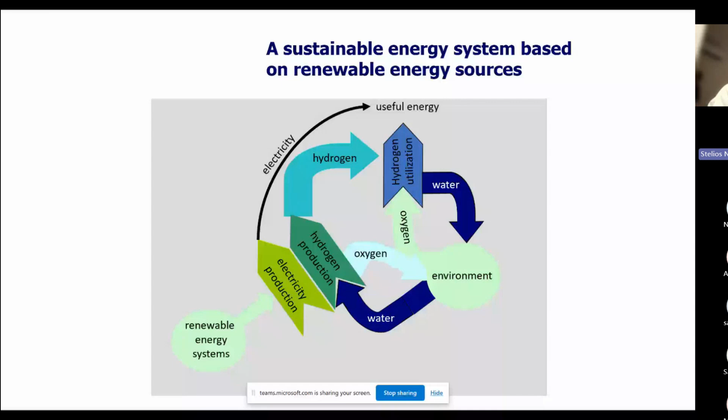So the idea is initially to produce hydrogen. How do we produce hydrogen? The hydrogen, when we're discussing green hydrogen, is mainly produced based on water electrolysis. So we get renewables and we electrolyze water to produce hydrogen and oxygen. Hydrogen is mainly stored, which is used afterwards with any fuel cell technology to produce electricity, just to feed and provide electricity to any kind of needs that our modern societies require.

So I will focus mainly our discussion on the fuel cell technology that we have developed, and discuss a few applications based on this technology, because as you know, there are different types of fuel cell technologies, based mainly on the materials and the ionic transport that each technology is using.

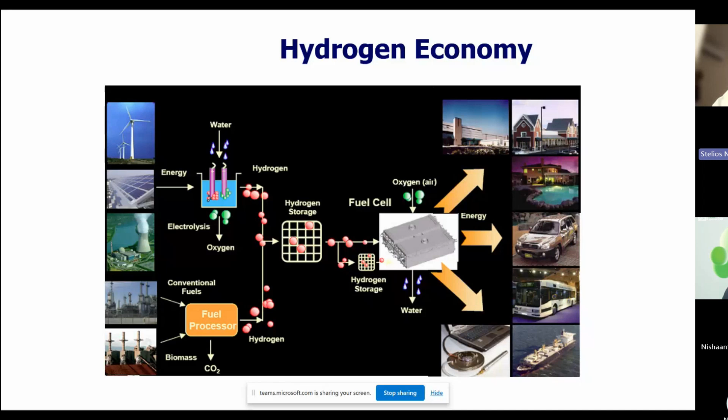This technology has been developed over the last 20 years. It is a proprietary technology, and the investment in this, and the research projects that were activated to do this, are estimated at over 20 million euros.

So we have a vertical know-how, and as you can see, we have activities and knowledge on the development of new catalysts, polymer membranes, polymer electrolytes, electrodes and membrane electrode assemblies, engineering and designing of the electrochemical reactors, and the balance of plant that is needed to put all this technology into operation.

So you can see a real view of what we are producing here. On the left side, it is the so-called high temperature PEM fuel cell. This is an example of a 2 kilowatt fuel cell. We are also developing high pressure PEM electrolysis, approaching 100 bars.

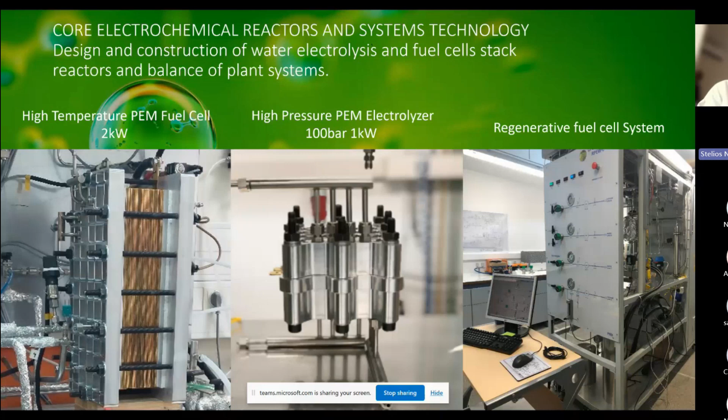All these activities, over the last 10 years, have been developed and financed also by the European Space Agency, as you can see. And you can see the balance of plant just to incorporate these two and work to produce electricity, produce hydrogen, and also electricity from the renewables.

I would like at this point to mention my colleague, Professor Ioannis Kallitsis, who is a professor at the University of Patras. He's a polymer scientist, and together with his group we have done all these developments that I'm going to show you.

This is sandwiched between the two electrodes. The electrodes are conductive, and they contain the so-called electrocatalyst, on which the two half reactions, the anodic and cathodic reactions, take place. This assembly allows the oxidation of hydrogen at the anode into protons and electrons, and the reduction of oxygen at the cathode into water, by reacting the oxygen with the protons and the electrons.

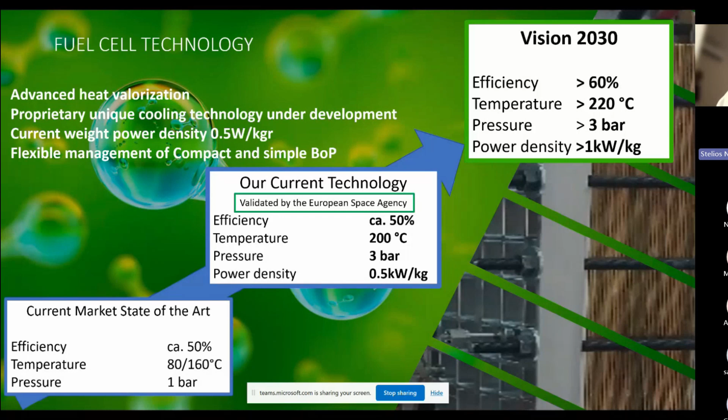So I will enter and discuss a little bit on the applications. I will start with the unmanned aerial vehicles or small aircrafts. This technology is quite interesting for this. This is an example of the fuel cell that we have created in collaboration with the European Space Agency.

For the time being, we are working on this for the development of a system for life support or for lunar applications. On the right side, you can see the characteristics of the system and of the reactor, and you can see it is possible, at the very end, to operate at an efficiency of around 55% and a power density of around 0.6 watts per square centimeter.

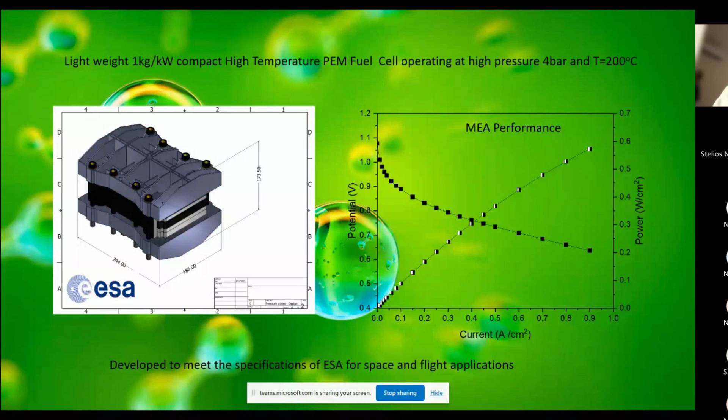This is the system that we have in mind for the applications regarding the UAVs and the general aviation. So this is a very simple balance of plant. You have only the fuel cell, which is air cooled, so you will not need any voluminous heat exchangers to cool down the stack.

You can have hydrogen and oxygen either in high pressure or in liquid form. It is something that is under discussion in the case of aviation. And what you have to do is control the flow that is entering into the system. So we have a very simple balance of plant. We can supply the gases in a pressurized form.

The fuel cell, due to the fact that it's operating at this high temperature, it is very easy to cool down by just blowing air on the fuel cell. And the fuel cell can be heated very fast and reach 100 degrees, which is the starting operating temperature of the fuel cell, in 5 minutes. And the heating up process is done electrically, utilizing a very small battery to do so.

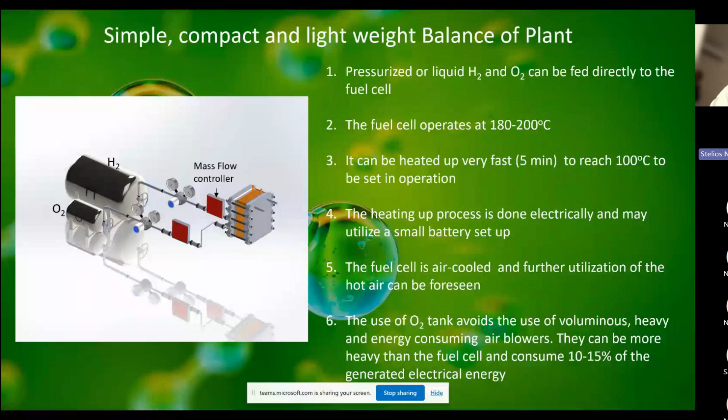And the fuel cell, as we said, is air cooled, and we are proposing the use also of an oxygen tank instead of incorporating voluminous air blowers that will add additional weight to the system. So the resulting benefit of using these high temperature PEM fuel cells is that the high operating temperature of the fuel cell can allow it to be very simple, cooled down with air.

The feeding gases are not humidified, and I can compare this technology with the low temperature PEM technology that needs humidified gases. So you need another peripheral, which adds additional weight to introduce. And this makes, as we saw, the balance of plant quite simple.

The feeding gases can be introduced into the stack even at very low temperatures, even below zero. So there is no reason to develop systems to heat up the gases. And the cooling effect of the oxygen and hydrogen entering into the reactor is very minimal. So we estimate, and we also measure, less than 10% of the heat produced by the fuel cell is needed to heat up the gases.

So the stack can easily afford operation at higher operating pressure. It can operate at 3 or 4 bars, and this is something that is already proven. We can achieve right now fuel cell power densities of 0.5 watts per square centimeter. If you put the fuel cell together into a system, the power density of the system is around 1 kilowatt per kilogram, which makes this system quite competitive with the conventional internal combustion engine systems used in aviation.

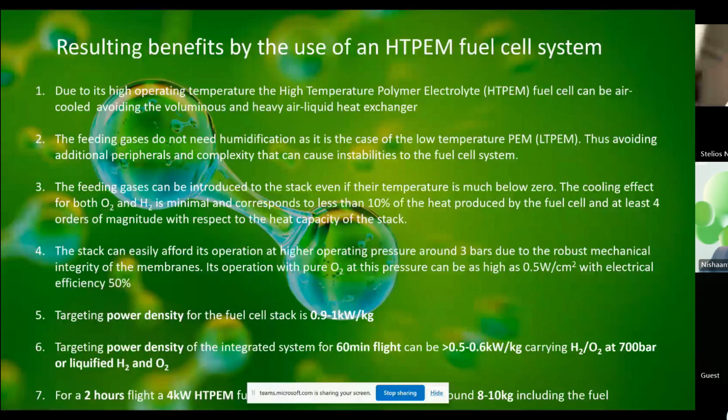The other thing we have to mention, especially when discussing UAVs, is that it is estimated that the flight time, by using fuel cells and pressurized or liquid hydrogen, can be doubled, and we can achieve longer flights as compared to the batteries that are being used right now for UAVs.

Another application, I will go faster in this, is the use of these high temperature fuel cells for stationary and industrial applications. Why am I focusing on this? Because of the high temperature operating temperature of the fuel cell, we can produce superheated pressurized steam, which can be used for several applications. I can give one example here: this pressurized steam can reach pressures up to 10 or 12 bars, and this can be even useful to operate a steam turbine and increase the efficiency in electricity production.

This is achieved because we have developed a closed loop for the cooling down of the stack. In this way, we are cooling down the stack by using a two-phase water-steam flow through the fuel cell, so that the coolant, which is mainly water, is operating continuously at the operating temperature of the fuel cell. So the fuel cell is cooled down by removing the heat from it through evaporating water, having a two-phase equilibrium within the stack to cool the stack down.

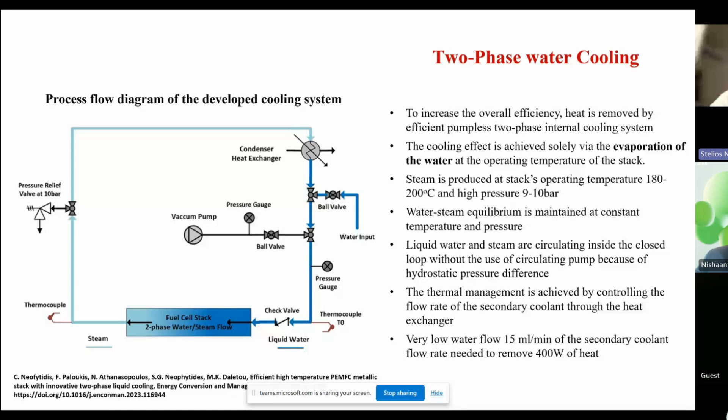In this way, we are able to come out with a steam which is at high pressure and high temperature, and can be used for several applications.

One application is mainly to produce electricity from natural gas, and this way we are able to increase the efficiency of the system by utilizing the heat produced by the fuel cell. When the fuel cell is producing about 1,100 watts at 180 degrees Celsius, about 440 watts can be used to create steam, which can be used in the steam reforming reaction of the LPG or natural gas. In this way, we can utilize this heat just to keep a high systems efficiency.

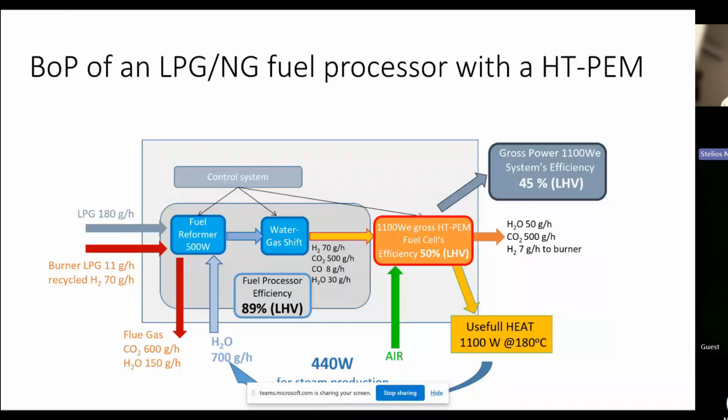Otherwise, if this is not done, the systems efficiency can be as low as 35%, which means we are losing a significant part of electricity. Instead of getting electricity, we're mainly producing heat. In industrial applications, we can have several examples of using this high temperature and high pressure steam for various industrial chemical processes. This is how the system I described before is operating.

What we are doing is using the reformate produced by the reformer. This is the performance of the fuel cell with that reformate. Because of the high temperature, there is no reason to completely clean up the reformate from carbon monoxide, as is the case with low temperature PEM fuel cells. You can see that the performance of the fuel cell is more or less similar to its performance when fed with 100% hydrogen.

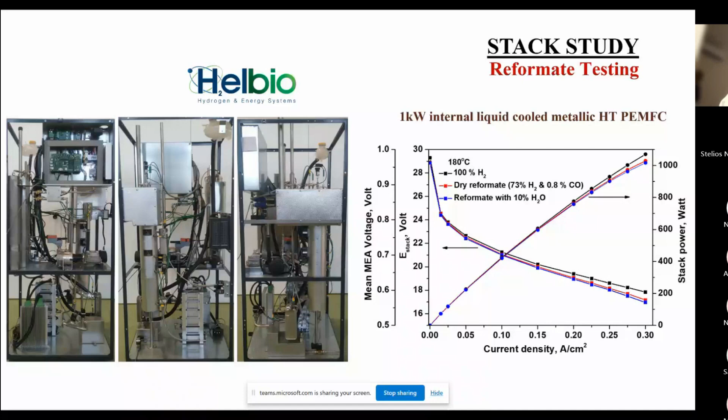I will say a few things on high pressure PEM electrolysis, in order to introduce you to the regenerative fuel cell approach. With water electrolysis, it is possible to split water, as you can see here, using renewables, into hydrogen and oxygen. Beyond this, with PEM electrolyzers using a polymeric membrane as a proton conductor, we are able to pressurize hydrogen and oxygen at very high pressures. At this moment, we've managed to do it up to 100 bars in a 1 kilowatt electrolyzer.

In this way, we are able to avoid voluminous and low efficiency hydrogen compressors. So the electrolyzer system is operating both as a water splitting machine and also as a pressurizing machine, a compressor for hydrogen storage at high pressure.

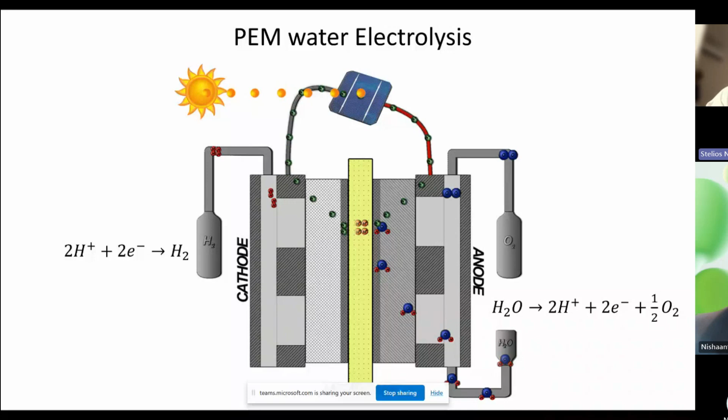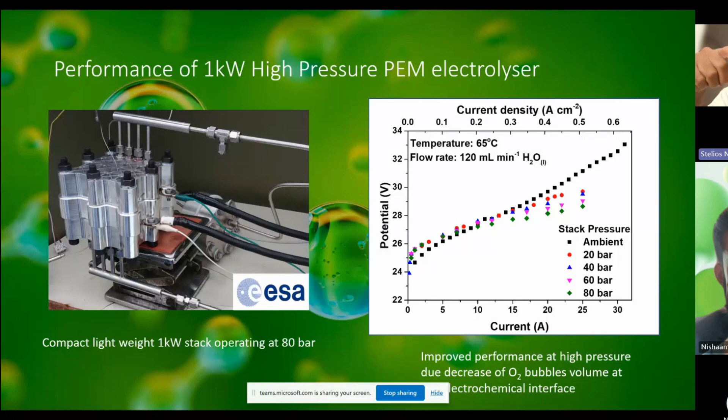This is an example of the reactor we produced for the European Space Agency, with specifications to be lightweight and to operate at very high efficiency, close to 85 to 90%, because we do not want to lose energy and produce excess heat from the system. This was done within the framework of our collaboration with the European Space Agency.

This is where we are now: operating at this high pressure with 82 to 85% efficiency, and aiming, with appropriate development of electrocatalysts and engineering of the system, to approach 200 bars at 90% efficiency.

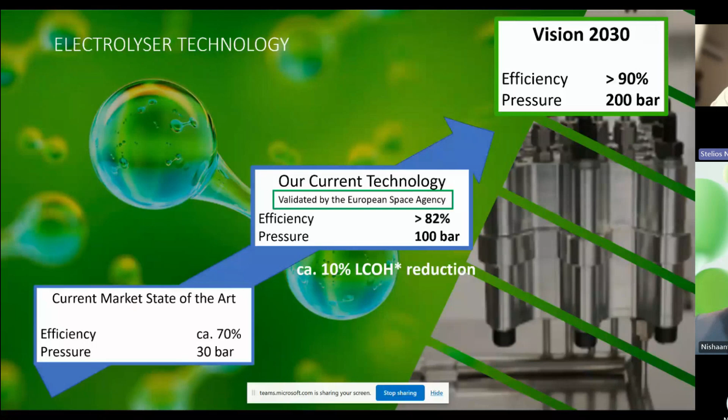This is the last application I want to discuss: the regenerative fuel cell system. This system can provide sustainable and uninterrupted renewable electricity and heat production. It combines a PEM electrolyzer that gets electricity from renewables and splits water. Hydrogen is stored either in metal hydrides or high pressure vessels, and is used at will to produce electricity when it is night or when the sun or renewables are not available. The high temperature PEM fuel cell is then able to provide electricity and heat for residences, if we are discussing residential applications.

The produced water is then returned back to the electrolyzer, so we are not spending any water in this case. This is a closed water loop. You can consider it as a black box which takes solar power or wind power, stores hydrogen, and the outlet of the system is mainly electricity production, also covering the heat needs of constructions, houses, and similar applications.

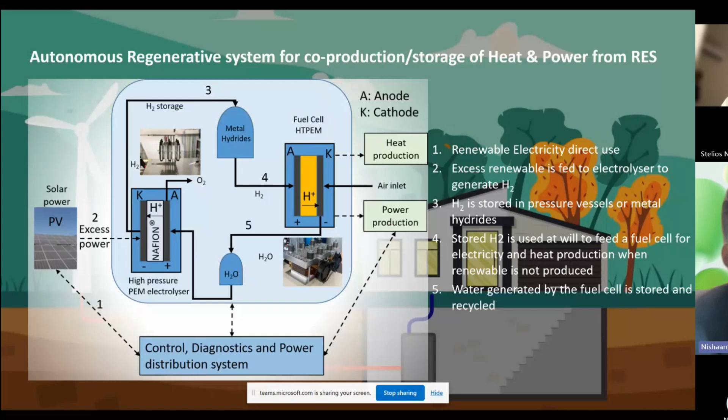We heard you speak about quite a few innovations, and you also brought about some applications that could have been new for several people here in the audience, Professor. What was the biggest innovation you've made in your fuel cell? That is giving it more versatility and flexibility.

This is mainly, we started with the development of new polymer electrolytes. So the polymer material that we are using as a proton conductor defined the technology, and mainly the operating temperature of the technology. It is very good to operate at this very high temperature, and I don't think there are other materials than the one we have developed to operate at this high temperature approaching 200 degrees. This technology operates with another material, the so-called polybenzimidazole, at higher temperature, but it's around 40 degrees lower than the temperature we are operating at.

So basically a very quick introduction. My name is Santosh, I'm the co-founder of H2 Carbon Zero and Umagine. I've been working in the hydrogen space for a pretty long time, in fact straight from college back in the Netherlands. I worked with Shell for a number of years, and then after a couple of consulting stints with McKinsey, started my own company back in 2019. So for the past 5 years we've been actively working in hydrogen, 2.5 years first in the Netherlands, and then over the last 2.5 years based out of India.

We primarily work on hydrogen fuel cells for stationary power applications, low temperature. But in addition to that, we've also been active in ecosystem development in India, working on policy aspects as well as strategy and EPC projects in the space of green hydrogen. So green hydrogen is all we do, that's our bread and butter, just like for Nish and the Professor perhaps, but very few of us are like that.

I'll skip the hydrogen basics, but I'll just say a couple of things here. Whatever large hydrogen production comes up, the application needs to happen - without the demand side, things are not going to work out. And we do see demand in the current industrial scale when it comes to refinery and fertilizers. But these are also the most saturated or commoditized markets when it comes to getting in hydrogen and having a bankable use case without constant subsidies. So we strongly believe in use cases where green hydrogen makes a business case even today - applications using fuel cells, certain heavy transportation applications, certain aviation applications, and primarily stationary power energy storage applications.

Beyond the global movement, everybody knows about the National Green Hydrogen Mission, there's a lot of work happening there. But one part people don't know much about is that the power sector aspect is pretty solid. There was an announcement by the power minister last year that they're looking at green hydrogen for long duration energy storage applications rather than battery energy storage systems - we're talking about 6-8+ hours of energy storage, where about 100 megawatts of projects are going to come up in the next couple of years with some viability gap funding.

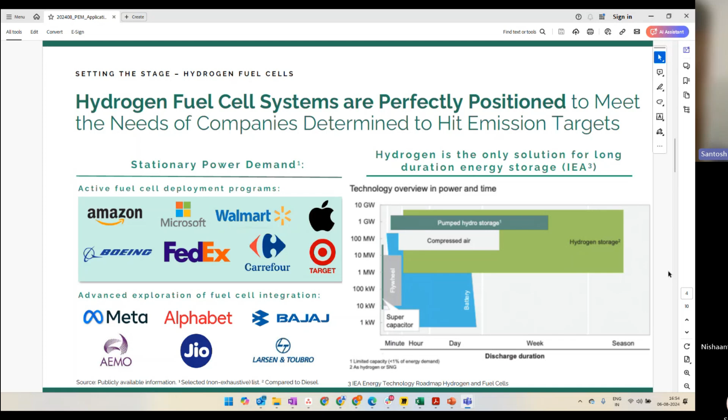And why hydrogen for energy storage basically comes down to this chart. This is not our analysis, it's IEA's. Our analysis comes in the next slide. For very short duration energy storage, let's say less than 1 or 2 hours, we expect battery to be the predominant solution. But according to IEA, anything beyond half a day or longer, hydrogen is the only solution across various use cases. There's a gray area in between, which is a bit geography dependent, but this is the fundamentals of why hydrogen energy storage and hydrogen-based fuel cells make sense.

Perhaps not that interesting to many, but the market size for fuel cells is actually quite big because it has to do with power generation. There are a lot of different applications across prime power, backup power, and material handling. But the market which is currently serviceable is fairly limited, because of the high cost of electricity from fuel cells and hydrogen. As it goes down over the next few years, we expect the market to ramp up and be one of the drivers for the green hydrogen economy overall. That's what we expect going forward.

What we see right now is that when you compare all these technologies across levelized cost of electricity, anything above 6 hours, fuel cells are the cheapest. Not a lot of people realize it, but actually hydrogen fuel cells based on green hydrogen have the lowest LCOE even compared to diesel gensets for long duration, even today. And this 6 hours is going to go down to at least 3 to 4 hours in the next few years. That's when it will be complementary with batteries, which will be great for short duration.

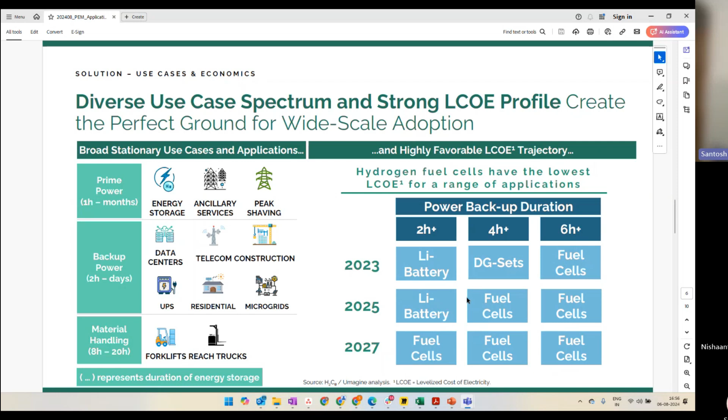Basically, a hydrogen fuel cell—the Professor already mentioned about it—but beyond the core fuel cell stack, there are a lot of different things in a hydrogen fuel cell. For those who are new to fuel cells, very quickly, hydrogen fuel cells are very much comparable to diesel gensets, but not to batteries. Why? Because the fuel cell is the genset, of course with a very different philosophy, but you have hydrogen as the fuel source, so that's what would produce electricity.

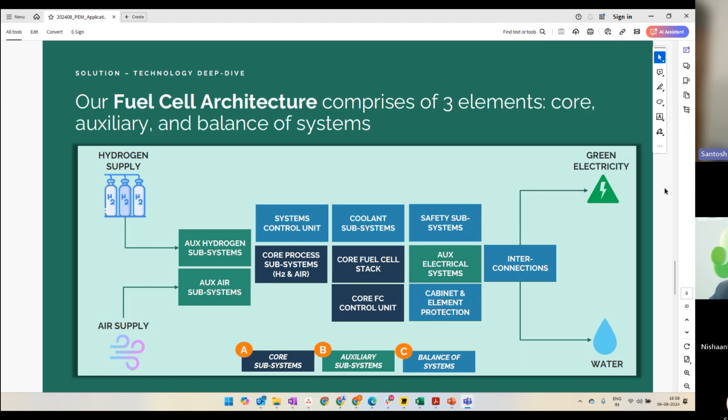So we have developed our fuel cell, and all these systems around it, including the stack, are developed in-house, completely bottoms up. That is where we believe the fuel cell stack technology is pretty mature. In fact, there is still a lot to be done, just like the Professor was mentioning, but a lot of work has already happened. At a system level, we believe that in the end of the day, the customer is going to buy the entire fuel cell system, not only the stack, and the stack only contributes about 30% of the cost. So we have demonstrated and worked on all these systems to achieve our designs.

Currently, this is a very important number. If you go and buy a fuel cell for the 100-200 kilowatt range, you're going to pay about $1,500 to $2,000 per kilowatt. So our target is to decrease it by almost one-third or one-fourth in the next couple of years by indigenizing almost 95-98% of all the subcomponents. The entire design and engineering is ours, but by moving towards maximum indigenization, utilizing the Indian supply chain ecosystem, we strongly believe these numbers can be achieved.

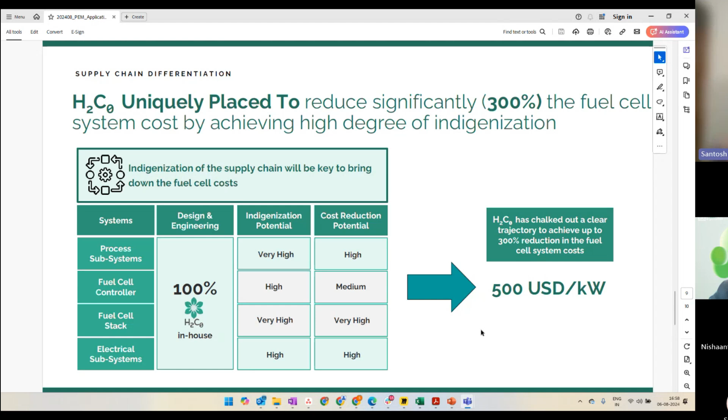And if these numbers are achieved, then there is no place for diesel gensets in the market anymore. So that's a very quick brief of what we are doing and what it's about. Happy to take any questions. Or Nish, over to you.

Thanks, Santosh. I think that was... thanks for breaking it down for people who don't really speak the language. It was quite fascinating to see quite a lot of things in your presentation, but we're already getting questions about the feasibility of what's the levelized cost of energy today for a fuel cell backup. Do you have a straight answer? Because I've been exploring this—people do tell it is cheaper, but then how do you set it up and how do you deliver the project?

So everything depends on the kind of application. Let's say a typical comparison for a 200 kilowatt fuel cell, which has to operate for 8 hours a day, 8 hours of backup. Then the cost of electricity from hydrogen fuel cell—in rupees, it's about close to 35 rupees per unit per kilowatt hour, compared to diesel which is more close to 40, and compared to a battery which is more close to 45.

I mean, talking about an 8-hour storage. Now that is considering the current prices of hydrogen and hydrogen fuel cells. As this hydrogen price decreases, let's say to 200-250 rupees per kg, which is of course everybody's target, and that's why all these $250 billion of subsidies are for—we are talking about cost of electricity from fuel cells being less than 15 rupees, 12 rupees, or even 10 rupees per unit. So when you then do a levelized cost together with hybrid solar wind, the round-the-clock power is going to be pretty cheap and pretty affordable, where fuel cell can act as firm power and solar and wind as intermittent power. So that's the numbers we are looking at right now and in the future as we go ahead.

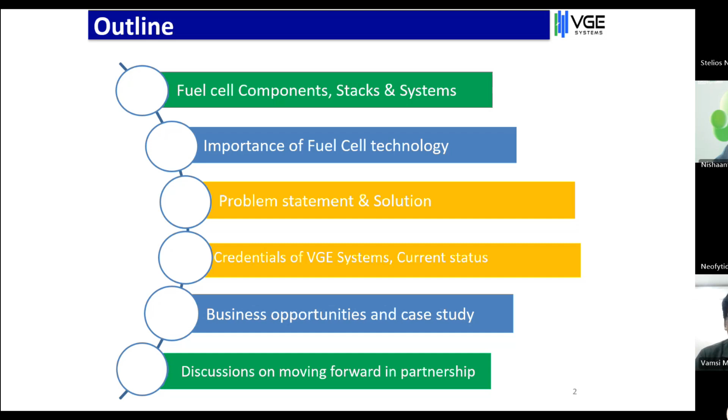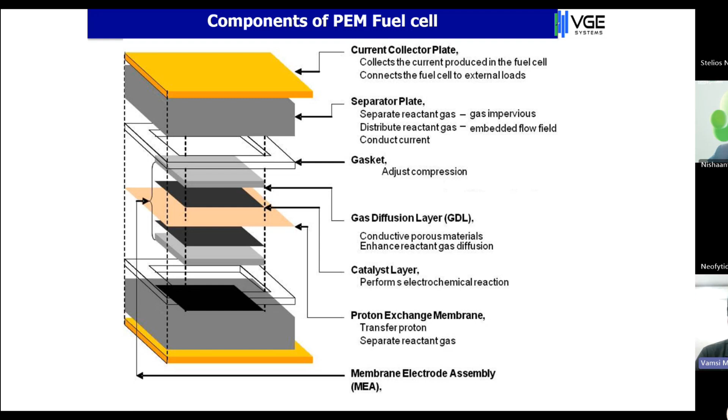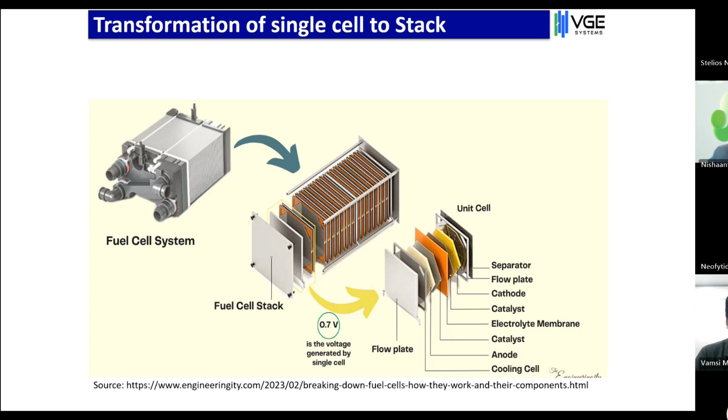So this is how the fuel cells transform: cell to stack, stack to system. And these are all the components we developed indigenously, all from development funds. One premium quality of our company is that we did not invest 1 rupee; we are always dependent on developmental projects, and we have developed projects suiting to us as well as the client.

For example, BHEL gave us a funding project for development of a gasket. We developed the gasket for ourselves, indigenized it, and then sold the gaskets to BHEL. So we have special gaskets which we developed, and we also offer composite plates, bipolar plates, suitable for fuel cell or flow battery technology, which you can evaluate. You can come to our lab and see how the gaskets and bipolar plates are made. We are also developing a novel process to minimize the machining cost in the CNC, making the micro channels used for distributing the gases. This will cut down the cost immensely, both time for the CNC and the cost itself.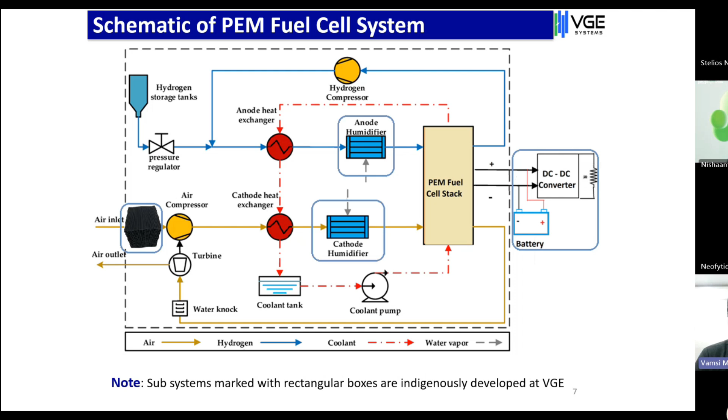And of course, why fuel cells are important: system compaction, it is more silent. The cost competitiveness in heavy transport applications - for two-wheelers, three-wheelers, and very light commercial vehicles up to 1 ton, battery is the best. When it crosses that, then for buses and large LCVs, fuel cells are the best. Refilling time is just like CNG, so no worries on this.

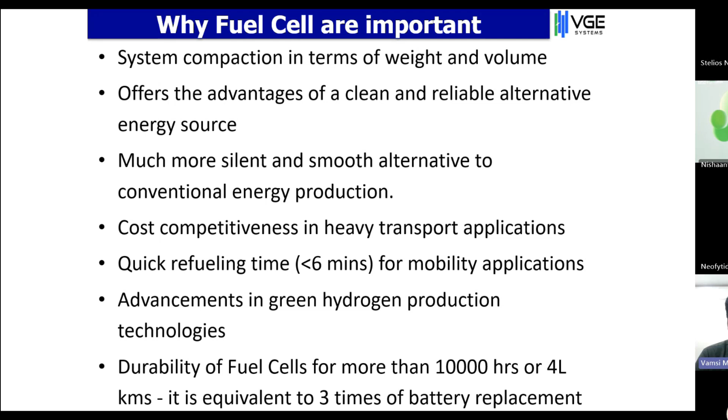The national perspective of hydrogen is already laid down by MNRE, and it is widely available. I've just given an outline of this. This presentation I already shared with Nishant sir, and Nishant sir can distribute it to whomever concerned.

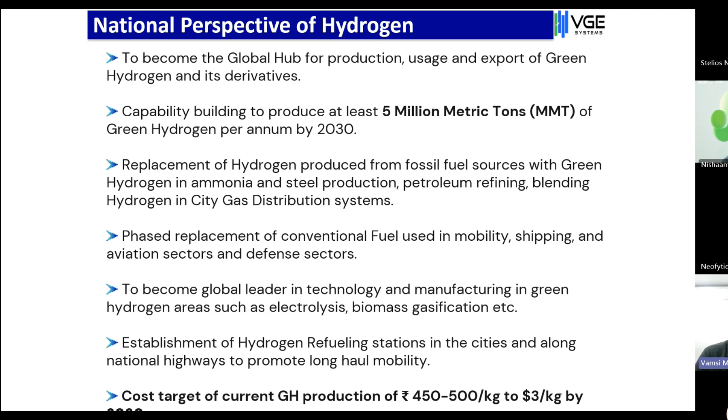Dr. Vamsi Krishna is our testing man, and Dr. Sumant worked in Chevron for 35 years and joined our company - he is very good at hydrogen safety and transportation. We also have Kushagra Yadav in composite materials. All together, our team has 21 people.

All are engineers, and we have 7 doctorates on our team. What makes our fuel cell more efficient, I can give you one statement: we make our fuel cell with love, like our baby. But who has to verify it? Who has to vet it? There are players who will come and make our fuel cell more redundant and robust.

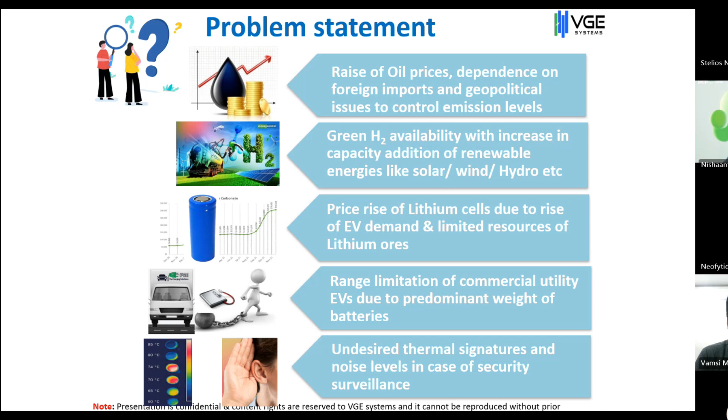This is the problem statement that everybody knows: the rise of oil prices, green H2 availability, rise of lithium cell costs due to rise of EV demand. The solution is using hydrogen as an alternative green fuel, carbon neutral energy using fuel cells.

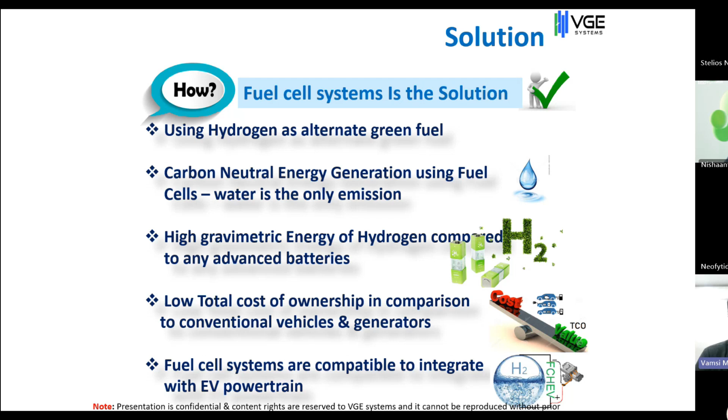One of the major projects we are also doing is for the military. This is a classified one, so I don't want to elaborate more on this, but fuel cells are widely used in military and BrahMos missiles too. We are working on them, but they do not want to share that, so we are not sharing it.

The uniqueness of our startup is a TCO demonstration of LCV trucks for a range of 350 kilometers. We are doing system development with indigenous subsystems, and we have a rich team as explained.

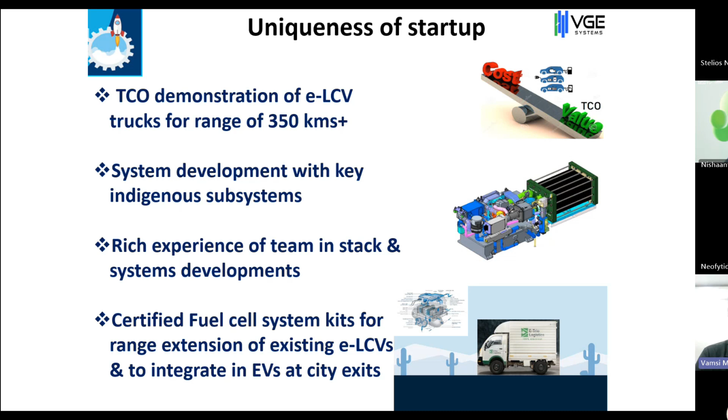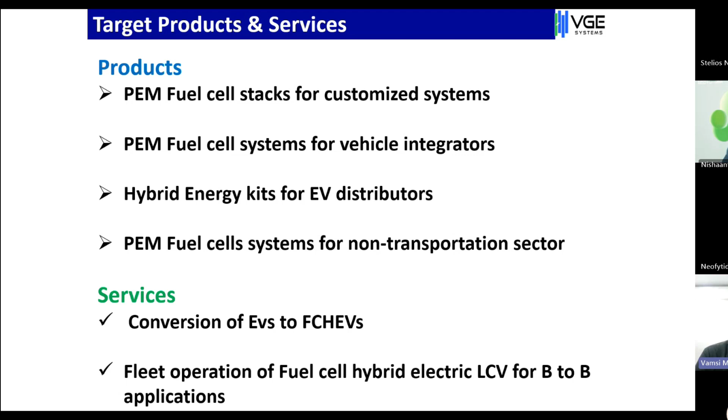Target products and services: fuel cell stacks for customized systems, fuel cell systems for vehicle integrators, hybrid energy kits for EV distributors, and PEM fuel cell systems for non-transportation sectors like solar, telecom backup, ATM backup, or generators.

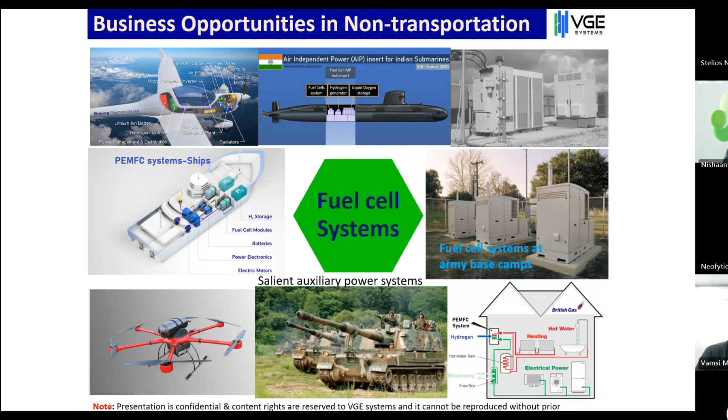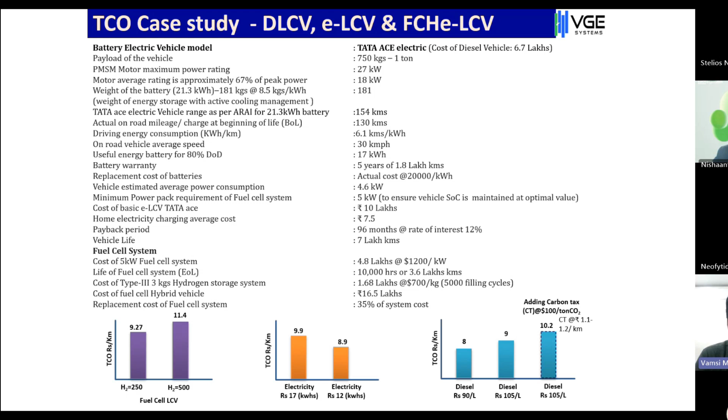This is a TCO case study we have done comparing diesel, electrical, and fuel cell. If the cost of hydrogen comes at 250 rupees, then the cost per kilometer for the fuel cell will be 9.27 rupees. This chart is a calculation we have done with real figures. Nishant sir, please have a look at it yourself.

No, Vamsi, thanks for making that very quick as well. I like how you did this in the most simple manner. But this is an open question to everybody, all our expert speakers who are here.

Where do you see applications for PEM fuel cells? Let's not talk about high temperature PEM - I understand that's a little more niche - but generally for fuel cells, where do you see applications taking off at large scale before any other segment or industry?

Yes, Vamsi, go ahead. See, already fuel cells for mobility applications - people are widely using them in forklifts. That's already on the market. Plug Power has done an innumerable amount of business with forklifts - that's the easiest to take off for fuel cells at this moment.

At this moment, I would say microgrid is the most important topic - a real commercial application which our other friend is already doing. Then, of course, the replacement of diesel gensets for strategic reasons - this is the second biggest thing. If fuel cell generators match diesel generator prices even with a 20% price hike, it will kick off very immediately.